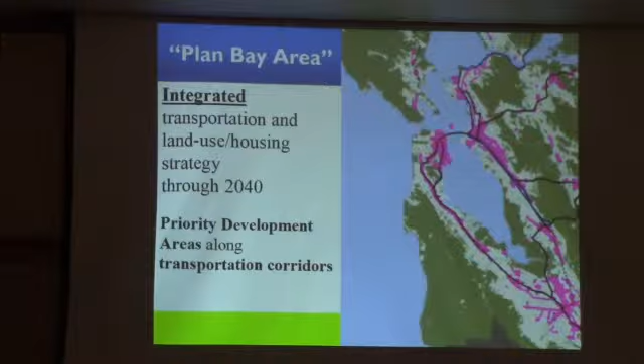So why transportation? Well, as we've been hearing, transportation is the elephant in the room. It contributes more than 40% of our greenhouse gas in the Bay Area. This is not true in other areas, but our Bay Area, transportation is the big culprit. So the plan was to focus all our growth now along the transit corridors with the idea that we need to reduce our dependence on cars, certainly not increase the number of cars, because we are already in trouble.

To make transportation options available, to grow our options of getting around without a car, and really to make biking and walking something that we would really want to do. It's really not safe now. I remember in Houston walking, I had to walk on the street. There aren't any sidewalks in Houston. So here we don't have sidewalks that are safe. So this is an important issue for us.

So the Sustainable Land Use Committee, which came into being partly because we saw how cities were struggling with this, we started working with cities up and down the transportation corridor in San Mateo and actually in Santa Clara as well, to look into what they were doing about planning to reduce their carbon emissions around transportation and infill growth on land use issues.

And in looking at it, we realized very quickly that everyone was at a different stage, and we needed to develop some guidelines for ourselves to evaluate what they were doing and how they were doing it, whether these plans were going to work. So we came up with these guidelines, generally focused on a station area with a radius of about a quarter mile or half a mile.

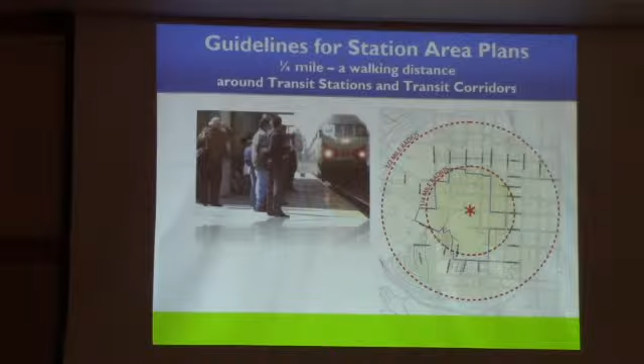To show how you were going to try to do infill growth along transit to solve your carbon problem, we felt there were 3 basic areas each city needed to address. The first is compact growth, bringing density around the transit stations or along the transit corridors, but with a lot of amenities so the community can actually walk to all its tasks.

So you don't have density near transit, which we call transit adjacent development, but rather transit-oriented development, communities with amenities you can actually use, and when you need to get somewhere, you can use transit. We thought the other thing was the transportation itself, making walking the easiest and pleasantest way to get around, and also creative ways to create more options if you needed to, not walk or bike, whether shuttles or other ways to get people out of their cars.

By discouraging car use while giving them other realistic options, whether it was car share. Since then, Uber and Lyft have become very big too, but they're creating transportation problems. And then the buildings themselves, greening the buildings.

So I thought the easiest way might be to discuss it by looking at a couple of our cities and what they have done. Is this working all right?

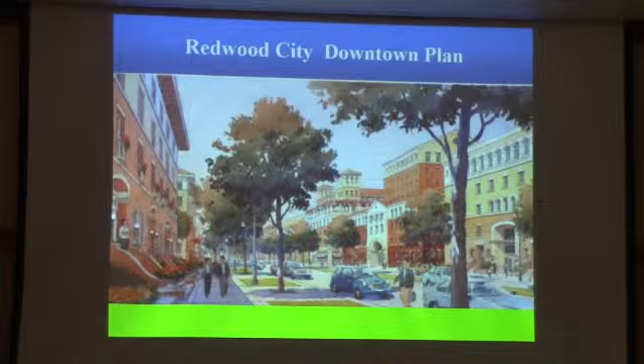With that in mind, they put on the front cover of their specific plan this image, so they always kept it in mind. They wanted pedestrian-friendly streets, which are beautiful, with trees, fewer cars, and they recognized that you don't get that kind of vibrant town without a certain amount of density. They thought of Paris and said, well, the entire center of Paris is 6 stories, and you have lovely street life. So they recognized that and accepted it.

So to their credit, they have executed that. In their specific plan, it sort of rises like a cone from 4 stories at the edges, to 6 stories, to even 8 stories. So they have put in place a lot of housing that is high-rise, and they've also got offices that are also high-rise, and there's several taller than this, to the great dismay of some of the residents of Redwood City, because they're not all very nice.

What they did do successfully was make Redwood City rich with amenities. This is crucial when you're trying to create a community, that they have all the things that you need. They have schools all around them, playgrounds, and two big grocery stores, Safeway and Whole Foods.

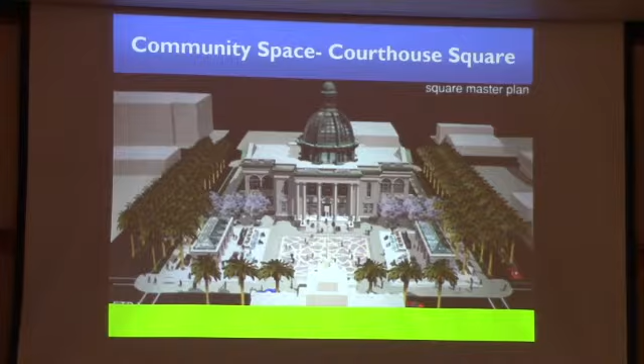They have all the shopping center services. They also decided they wanted to be an entertainment hub, so they moved the movie theaters in here. They have community Broadway plays, clubs, music. And then they decided early on, we need a living room for our city. Maybe, just maybe, if we build it, they'll come.

And they did. But I have to tell you, the best money that Redwood City spends is that tiny little budget in Parks and Rec. That is the best investment that they have.

As far as transportation, they have a pedestrian-friendly environment. There are streets that are purely pedestrian. They are working on their mobility. They do show you where you can park, with electronic signboards that say 221 spaces here, but then 400 spaces in the other place.

On the other hand, I want to talk to you about an example that happened to be in Santa Clara, this development called City Place. I just want to point out that Redwood City had a vision of where they wanted to go, but they executed it using those principles. In City Place, some of those principles have not come into play.

What you're seeing there is Santa Clara's vision of an entertainment center. They were very jealous of the fact that Santana Row is so successful, but it's on the border and really belongs to San Jose. Every revenue dollar goes to San Jose. So there's no 'there' in Santa Clara. They said, we want it here.

The white dots that you see in the corner is an industrial area, which they are zoning for housing. The reason is, so here we are: mixed use, compact mixed use is key. Well, City Place cannot have mixed use because housing is not allowed on a dump. The golf course is the old dump, which almost all golf courses are.

So there's no housing there. You have the entertainment hub in the middle, and as you can see, all around it is traditional office park with a lot of parking and multi-story garages. This is not what we call compact mixed use.

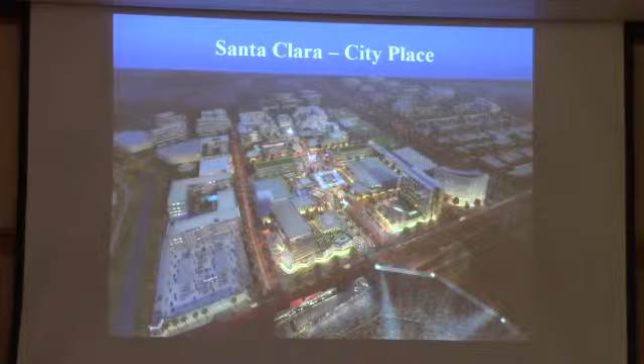So there will be housing, but it'll be in that corner. To their credit, they're doing high density, 100 dwelling units an acre. So there'll be 45 acres with 4,500 units. However, with 5.5 million square feet of office, you will generate 20 to 30,000 workers every day. That's a small town. And you have 4,000 to 5,000 units of housing. That's not a jobs housing balance.

This is the other part of resilience that we need to confront as a peninsula. We have a jobs housing imbalance. We need to put in place policies that balance the office construction with the housing development.

I will say Mountain View is, I think, the only city that has taken a step in that direction, in the Whisman district. They have what they call a jobs housing balance requirement, that they will not approve an office project until housing catches up. So I urge all city council members and planning departments to think about this. We need to work on this, whether it's at the ABAG level, as an area we need to work on this problem. That's an issue of resilience that we need.

The reason it's really good to have a good plan for growth is that when we talk about sprawling into the hills, or spreading into the bay, we can all say no, that we do have places to grow on our urban footprint. We don't need to fill in the bay, and we don't need to tear into the forest.

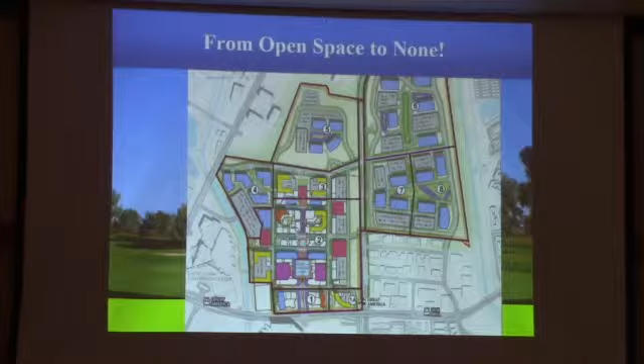So we really talked to them about having such a huge population—30,000 workers, 10,000 residents—and absolutely no place to go other than into your workspace. So we actually drew that up and went around and talked to everyone. Hey, how about, here's your opportunity to do a beautiful Santa Clara public park along the river. Wouldn't that be wonderful? You could put all kinds of amenities in there. Why don't you give 93 acres of your 240 to be a public park? It would be wonderful. And they all looked at us cross-eyed, like, you know what, the train is at the station.

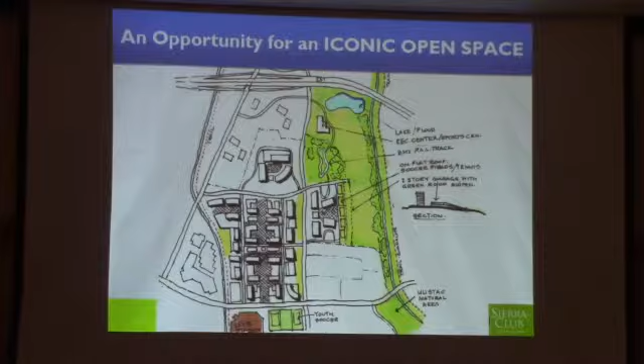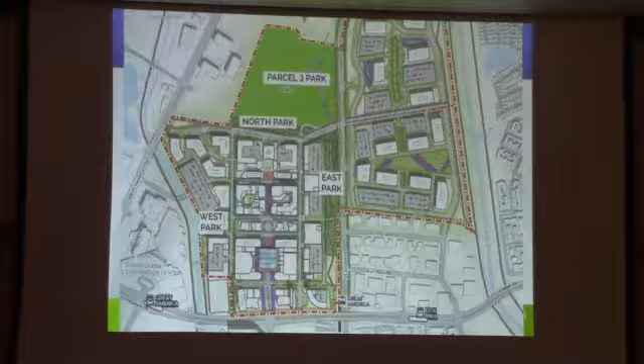So what I want to point out is that those policies are real. It's not enough to just come up with an idea—you have to take all those other items into consideration. How are you going to get there? Where are the people going to live? Is the jobs-housing balance going to work? Is there open space for people to recreate?

And so these are all issues of resilience, because when you have projects that come along right on the bay, like Facebook, the only good thing about Facebook is its rooftop terrace. Seriously? I mean, the traffic problems it's created—there's no way to get to it. Maybe it'll be the way to get Dumbarton Rail there, but that's 100 years—5 years from now. But you can see it's out in the bay. It's also bird-friendly design, because they did take that into account, which was really good of them.

But resilience as a policy is something we all need to take into account. We need land use policies for this century, not last century. Last century, we were filling in the bay. We wanted to fill in the whole bay—we wanted it to just be a river, not a bay. But in the 1960s, they stopped that. Now we're in the next century. We can't go back to filling in the bay. We need all these spaces to grow the bay as the bay rises, to provide wetlands and uplands, to protect us.

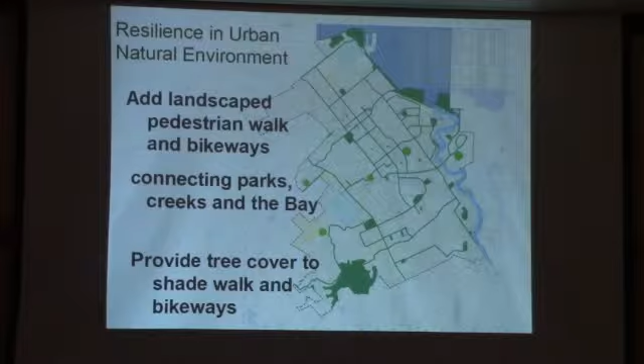And then if you add to that, you plant trees—I don't know if you can see it, but each of those has tree cover all along each of those streets. These are the streets where you want to plant your trees so you have shaded bike paths, shaded walking paths, so it's pleasant to walk around.

And that immediately brings up green infrastructure. How many cities already are doing green infrastructure? California state law is requiring every city to look at their green infrastructure, meaning stormwater. They're concerned that stormwater going into storm drains goes straight into our creeks and pollutes our bay. They've had it with that. Every city now has to do green stormwater infrastructure, putting stormwater into bioswales so it's filtered before it goes down into your storm drain, or hopefully into the groundwater to recharge it.

Now, the added benefit of this, and the reason we are the Sierra Club, is we were really looking for a way to get the bees and the butterflies from the bay to the hills. That's how we came up with this idea, and I think it's a damn good idea, if you'll pardon the French.

So, is there a dividend when we think of our policies as being resilient? You get a park network, you get shade trees, and calming the traffic, which is very important. If you're going to put pedestrians and bicycles on any street, you need to slow down the traffic.

We're getting a rising incidence of traffic accidents, and we need to slow the traffic by all the usual means: narrow the lanes, put in bulb-outs, reduce the number of lanes. These need to be your pedestrian and bicycle arterials—this is how you get around, prioritizing alternative ways of getting around rather than jumping in your car. This needs to be the pleasanter way to get around.

So you prioritize the green infrastructure, and there is a dividend. When they talk about resilience, they define it as a policy that solves two or three things at once, but also pays off an additional dividend that wasn't part of your original reason for doing it.

So here's our dividend: we get cleaner air by walking and biking, clean water with the infrastructure, and a much healthier lifestyle. And what the Sierra Club was after—the pollinator pathways—we need our bees and our monarch butterflies back. So we get all of this by doing that infrastructure. Thank you very much.